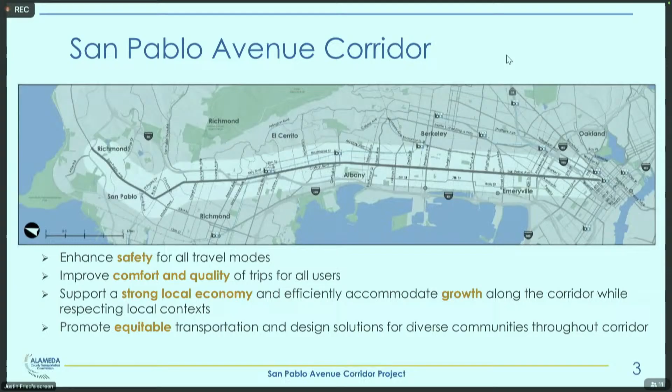In 2022, after several years of planning and visioning and considering different options for the corridor, there were 3 different projects identified to move forward within Alameda County, 2 of which touch the City of Albany. This map shows, in a very stylized way, what those 3 projects are. This was based on years of outreach as well as technical considerations. Within Albany, the two projects are safety enhancements, shown in green here. These are improvements to make it safer and easier for pedestrians and cyclists to cross San Pablo Avenue, as well as some transit stop improvements to make buses move more efficiently along San Pablo Avenue.

And then the other project is parallel bike route improvements, which provides accommodation for cyclists traveling north-south through the broader corridor on low-stress bike boulevard type streets parallel to San Pablo Avenue. The third project, which Alameda CTC is working on with the cities of Oakland, Emeryville, and a piece of it touches Berkeley, is a longer-term project that would implement dedicated bus lanes and bike lanes on San Pablo Avenue. But that is not within the City of Albany. Next slide.

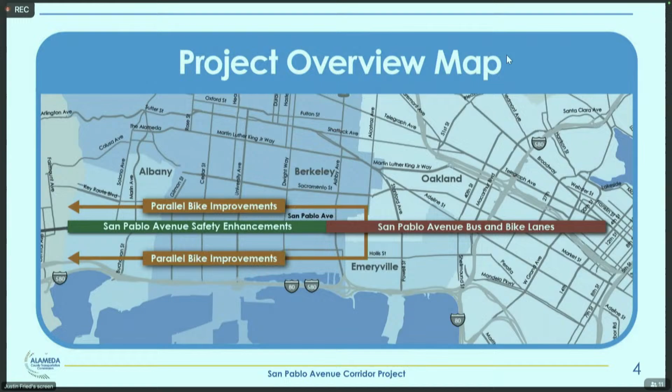This is a bit more of a zoom in on the northern two projects. So the yellow bar is intended to reflect the safety enhancements project, which extends from essentially the county line, the El Cerrito Albany city limit, down to Heinz Avenue, which is kind of north of Ashby Avenue in South Berkeley.

Within Albany, this project sort of fills in some of the locations. The city had a recent pedestrian safety improvement project along San Pablo Avenue that installed things like median refuges, flashing beacons, curb ramp upgrades at a number of the intersections. And then this project will kind of address some of the intersections not addressed by that project, such as Solano, Washington, Clay, Brighton, Marin Avenue.

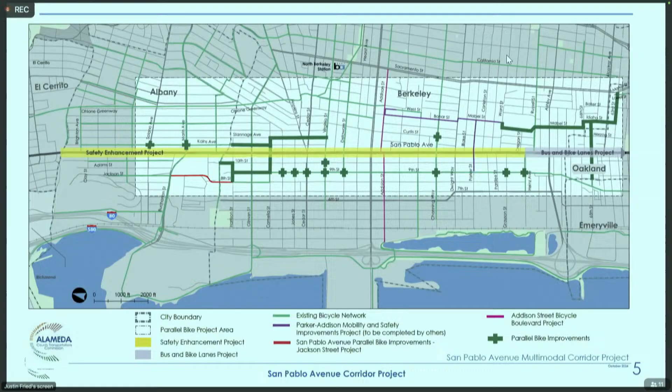And then the parallel route improvement project is represented by the bold green lines. And within Albany, there are two locations that the parallel route improvement project covers, which are the intersections of Kains Marin and Kains Solano, and the project is focused on crossing improvements for the bike boulevard crossings of those major streets. Next slide, please.

So this is just a little more detail on the types of elements and the status of the two projects. And I should mention that the Transportation Commission and actually City Council both got a presentation and took actions in support of the concept design of both of these two projects back in 2023. And since that time, we have secured full funding for the projects, made significant progress with the design of the projects,

completed all of the state environmental clearance, and we're close to completing the NEPA clearance for the Parallel Bike Route Improvement Project, which does have federal funding. And we're projecting to be ready to advertise this project for construction by spring of next year.

I talked about some of the elements that are within Albany, which are the major street crossing improvements at Kains Solano and Kains Marin. Elsewhere, this project within Berkeley and North Oakland includes elements such as diverters, traffic circles, wayfinding, curb ramp work, street paving. But in Albany, because of the work that the city's already done on the Kains and Adams bike boulevards, the project's really focused on those two crossing locations.

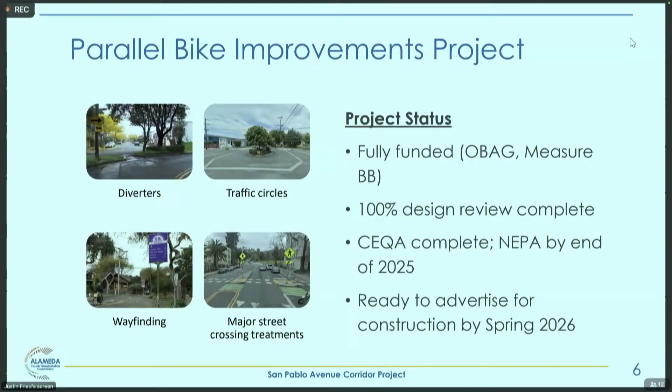Next slide, please. The safety enhancements project includes elements such as bus bulbs, which are large bulb outs allowing a bus to stop in lane, expanding the space for passenger waiting and meaning that the bus doesn't have to pull out of traffic and pull back in. These are proposed at the limited AC Transit stops, which within Albany is Solano Avenue and San Pablo Avenue.

And then there are also various locations with pedestrian hybrid beacons, flashing beacons, median refuges, curb ramp upgrades. There's also two locations where there are offset intersecting bike boulevards where the street doesn't connect directly through, and the project would be installing a short one block section of protected bikeway along San Pablo to assist cyclists in making that connection across San Pablo. One of those locations is within Albany at Clay and Brighton.

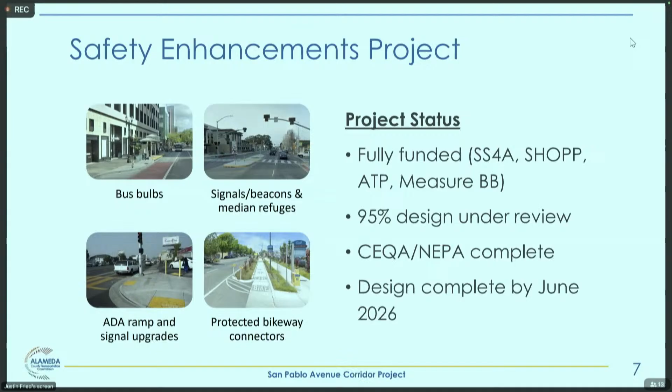This project is also fully funded, and we're at 95% design. We've completed all the environmental clearance, and we're also projecting to have design complete and be ready for construction by summer of next year. Next slide, please.

Just wanted to touch on some of the refinements that we've been making on these projects as we've been coordinating with city staff on the development of the plans, specifications, and estimates, and since the last presentation on the concept design to the Transportation Commission. So with the parallel bike project, and some of these are not within Albany, one of the topics has been bike detection at major streets.

In the Berkeley sections of the project, based on city experience with different detection technologies, and at their request, we've changed from video detection to push buttons. It's actually still a topic of discussion for the Albany crossings at Kains Solano and Kains Marin with city staff, just given some of the unique geometric considerations at those intersections that might make video a little more favorable in terms of bikes waiting where you would want them to.

The next 3 bullets here are really all outside of Albany. There's been a lot of work refining curb ramp designs and actually bringing some of the Albany-developed curb ramp design guidance to other jurisdictions and having that cross-pollinate across the plans.

The traffic circle locations within Berkeley, we have some of them we've moved to a mountable traffic circle design that works better with some of the light industrial land use there and large truck activity at the intersections where they're proposed, as well as just refining the sizes of the circles to accommodate necessary design vehicles.

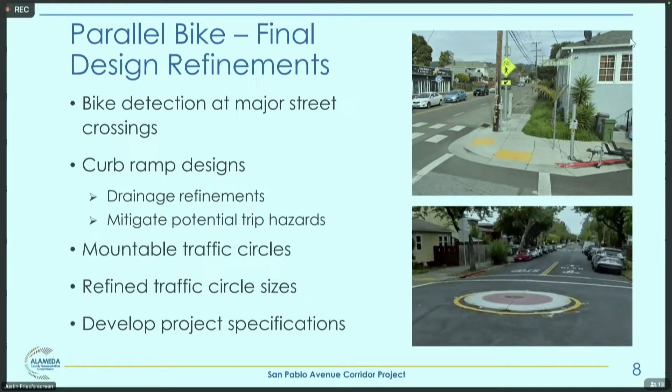On the safety enhancements project, some of the topics that have been major focal points is the final design has been refined. Again, the curb ramp designs. There's some challenging locations along San Pablo Avenue where you have business doors or other constraints right up against the back of the sidewalk that makes it challenging to achieve ADA compliant ramps while also getting directional ramps in there and all of the other things that we'd like to see in best practice curb ramp designs.

The bike detection technology on this project, we've also moved away from video towards inductive loops, towards push buttons. Within Albany, this partly relates to the fact that these are at Caltrans operated traffic signals, the traffic signals are maintained by Caltrans, and they have a lot of say in the detection technology as a result.

The bus bulbs, we've been working to figure out the drainage and the grading of those so that the curb height is 6 inches, but the slopes are ADA compliant 2%, which in some cases has meant moving to a design where it drains the water back towards the sidewalk and into a vegetated area, just because of existing roadway slopes and need for sidewalk cross slopes.

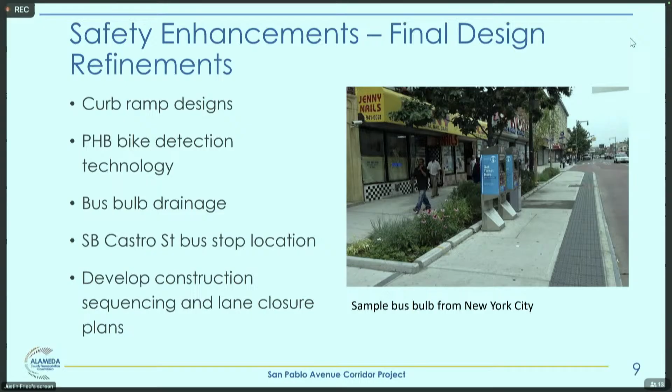This is mostly an informational update, and as mentioned, we do have more details on specific locations that we can turn to. But we do have one requested action, which is we are looking to convene a workshop-style meeting around the parallel bike project to talk about a couple of design topics that are of cross-jurisdictional interest for a cross-jurisdictional project. And we did want to ask if the Transportation Commission could select somebody to be the representative to that meeting and then report back afterwards. So hoping you could work among yourselves to find somebody and take an action to nominate someone.

Just a question about the timing of that. When do you plan to convene that? What's the window? Ideally before the end of the year, and this would be a virtual meeting, but the end of the year is quickly seeming very close, so we'll have to see if that's feasible. Yeah. Any questions from the commission?

Sorry, gathering which one to start with. I noticed in the presentation provided in the agenda, with some more of the specifics at each intersection, there were some where there was a callout for the detection on one side but not the other. I'm wondering if that was just a formatting thing. Let me pull up one as an example. That was just trying to keep the image from being too cluttered with too many callouts.

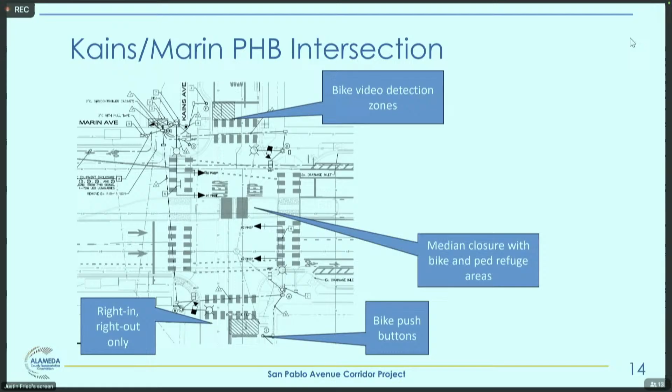Thank you. And then at the San Pablo crossings at Washington and then Brighton and Clay, where you have to do the little jog over, is any wayfinding or signage included in those plans? So the Washington crossing actually got quite a bit of discussion when it was presented to the Transportation Commission a couple of years ago. What's proposed here is signalizing the south leg of the intersection, which right now is unsignalized, and then essentially mainline San Pablo Avenue traffic would be held while cyclists and side street traffic make the two turns, one onto San Pablo and then the other off of San Pablo onto Washington.

So there are sharrows currently proposed in the design because it would be a shared lane operationally for bikes, but they would be doing it without mixing with the main San Pablo traffic. We don't currently have any specific wayfinding signs. It's something we could take a look at with city staff, maybe something on the side street approaches directing people how to get through the intersection.

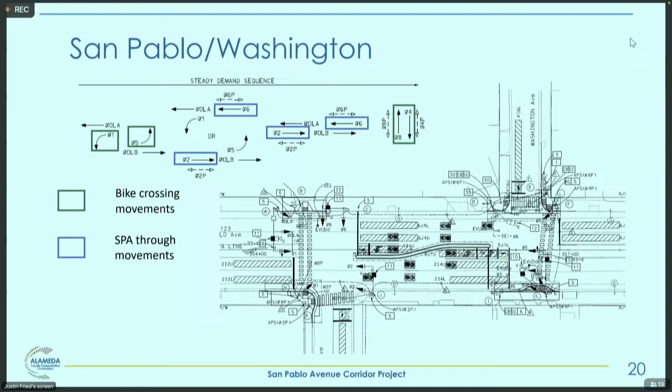And then the Clay and Brighton one is actually proposed to be a Class 4 separated bikeway with a concrete separation island between the outer travel lane and the bike lane. There are supposed to be intersection crossing markings for cyclists, which would convey the path through the intersection. But yeah, again we could look at wayfinding on the side street approaching it. Thank you. I have one more question.

Oh, while we're on this slide, if I may. There seems to be a net parking loss in this section on San Pablo. Could you detail how many parking spaces are lost? The red curbing. Yeah, I don't have that number available right now. We did do outreach to all of the businesses back in 2023, before we brought the concept design to the Transportation Commission and the council.

The two blocks here, one of them on the southbound side is the Albany Bowl redevelopment site, and that's going to have very different uses with different curb management needs. The northbound side is predominantly the Goodwill, which has a large off-street parking lot. But there are two other businesses there, and I personally use those parking spaces, and I'm just concerned about the loss of those. So it'll be useful in future iterations if you can detail that for us.

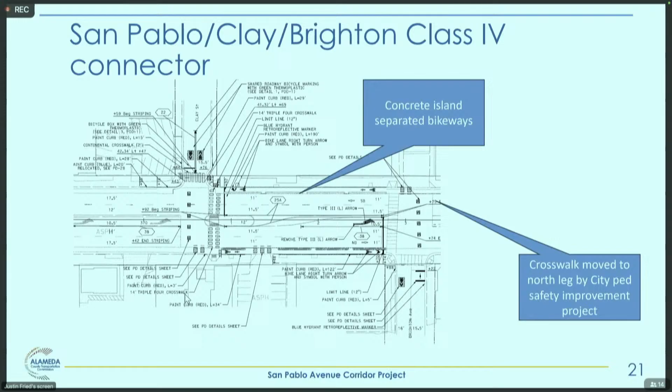Okay. You go ahead, and then I'll ask mine. Actually, if I could follow up on Judy's comment, two other businesses on the northbound side? Yeah, there's a dog grooming and a ceramic studio. Aren't those located to the south of the stoplight? No, I don't think they are. I believe the red line is more or less at the intersection, what the redlining will affect. Okay, thank you.

My last question is about the bike detection cameras. You mentioned there's a question of whether you want to use them or not, and I'll save some thoughts for the comment section. But I've also observed that they're effective in some locations, like I use the Ashby and Hillegass crossing every day, and I think that one's really effective. So is there anything you've found that makes some technologies more effective than others? And is the plan to use those types of effective technologies in this plan?

So as the agency that's constructing this project but won't actually own and operate it, we're largely deferring to the agencies that are going to own and operate it in terms of what technology or which product they want to see. And oftentimes it's what they're currently maintaining, not wanting to maintain too many different technologies or products.

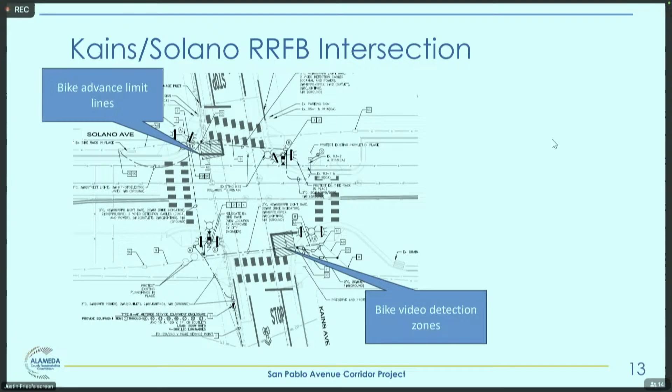Thank you. Any other questions? You had one. Yeah, this is just a really straightforward question. Are these plans coming back to us for review at any future time? We are planning to come back to the Transportation Commission. Okay. Probably early next year.

Okay. So right now, this is not the time to hash out all the details, is that what you're saying? Or do you want as much feedback and hashing out of questions as we can get now? As much as we can get now. Okay, perfect.

And just to follow up on that, what is the anticipated timeline of this project? When would it actually begin to be built out? So for the parallel bike route project, we would have the design complete towards the end of next spring, which means there's some time to hire a contractor. Actual groundbreaking would be towards the end of next year, most likely. For the safety enhancements project, it's about 3 months behind.

And then just as a general comment, throughout this presentation and many presentations that I've been to as a commissioner on the Transportation Commission, we refer to bikes. We're talking about a whole bunch of other modes of transportation, and I would encourage all of us to use broader language when we're talking about the use of these lanes. It's personal transportation devices, it's electric bikes, it's all sorts of things. So bike is a little bit dated in its usage, and I think we should broaden that.

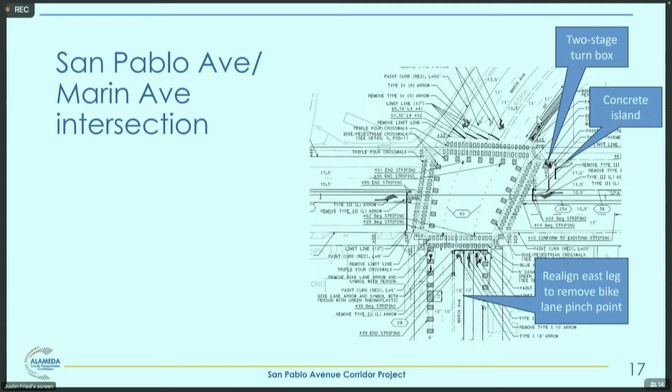Okay. So there's actually kind of a convoluted storm drain hazard there as well. Yeah, that storm drain would be reconstructed as an inlet type where it's contained within the curb and not sticking out into the bike lane. And then right now, cars sort of start the turn as they're going into the intersection and drift into the cycling or mobility device lane, so it would straighten that out approaching the intersection. All right, thank you. Any other questions or comments from the audience? Okay. And back to the commission for discussion or any other questions that may have come up.

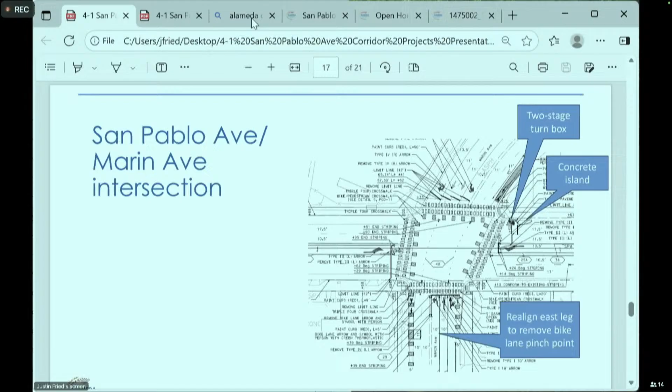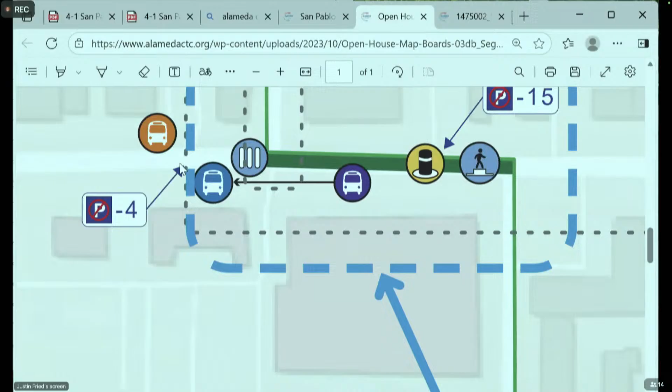Well, let me just add, since there was an earlier question on the parking, I did bring up the earlier outreach materials that identified approximately 15 spaces of parking impact between Brighton and Clay, and then approximately 4 north of Brighton with the relocated bus stop. Correct. Thank you.

Well, first, I just want to thank you guys so much for all the work and for bringing it to the commission. It's really great to get to look at and comment on. And also to all the public comment, really great ideas, and I hear you, and I definitely want to urge everyone to stay engaged with the active transportation plan. I hope that we've heard what people were suggesting about the intersections and the connectivity, and especially the all ages and abilities. And if those things can't get addressed in this already 100% design, I'm looking forward to carrying that energy to the active transportation plan. So maybe we'll have some more updates about timing of that.

But on this plan, acknowledging again that it's at 95 and 100%, but also piggybacking on the suggestions that Ken earlier made and a public comment made, I would like to urge also for those, what is it called?

The little slot, I think someone called it, especially at the Marin crossing and the Solano crossing, to relocate that push button, especially if we're looking at the possibility of eliminating the video detection or having a combination, basically a situation where we're relying on the push button. The way it's currently configured, especially in each of these intersections where cars are going to be turning right, is with the push button also on the right. It just automatically puts the person using the bike lane in a dangerous position for the car turning right.

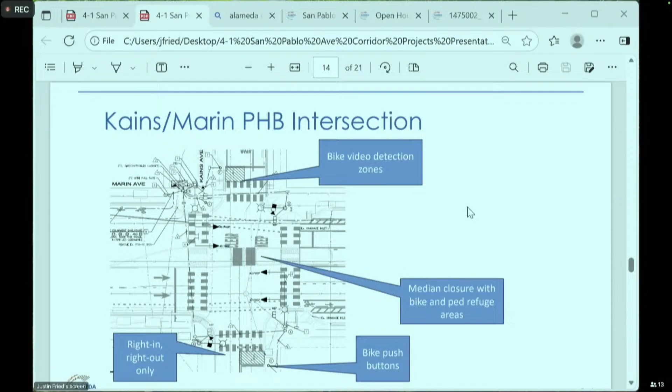For the cross-jurisdictional meeting, I'm happy to be an alternate if Ken can't make whatever time comes up. If there's anyone else who's particularly interested in attending. I was going to nominate Ellen, but I don't know if she wants that nomination. I was going to nominate Sarah. Honestly, I think anyone. You guys would be great. And if someone else would like to be the alternate to Ken or wants to be the primary, I'm totally open. Does not matter to me. I have a pretty flexible daytime schedule, except for the first 2 weeks of January. So an alternate is a good idea.

Okay. Frida, your comments made me feel like I needed to ask a couple more clarifying questions. We mentioned earlier a net loss, or Justin counted up a net loss of 19 parking spaces. I assume that 19 parking spaces is the full extension of San Pablo north and south through Albany, but you counted 19 parking space loss. That's for the Clay to Brighton zone that you asked about. Clay to Brighton is 19 spaces. Okay, so the net loss is not counted yet.

But I just wanted to point out that I really hope that we can make this work for all users. And I know currently that the backup on Marin crossing San Pablo at certain times of the day goes all the way up to Masonic and beyond. And I would hope that none of these changes are going to extend that, because that will increase the frustration of drivers, and frustration of drivers will invariably result in risk to bicyclists and non-motorized vehicle users. Pedestrians, yeah. Pedestrians and others, yes. All of us who are vulnerable to cars.

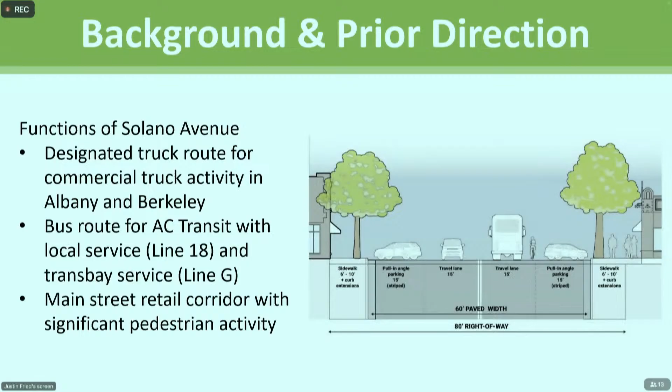It also has various characteristics across its segment, various levels of upgrades that have been done to date, with upgraded curb ramps for Madison to Masonic, upgraded streetscape work really done from San Pablo to Masonic previously, identified short-term accessibility upgrades and sidewalk pavement repairs. That's an upcoming capital improvement project. From Masonic to Tulare, identified additional streetscape improvements needed for that same corridor, and the roadway with similar characteristics continues into Berkeley outside of Albany jurisdiction.

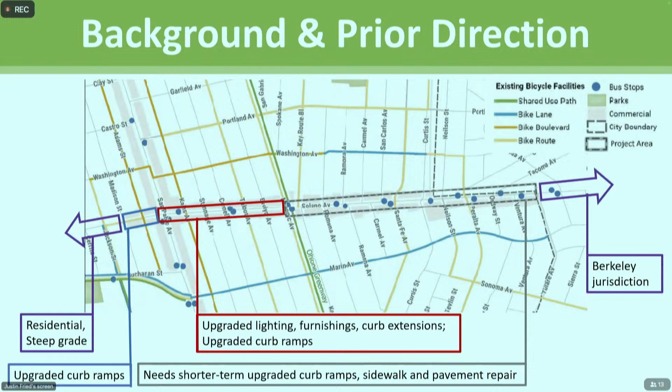And just real quickly, there's sort of two components. We're looking for direction on what to designate or not for bicycle facilities on Solano. A lot of the content will be focused on what we see as the next needed streetscape project, which is Masonic to Tulare, but the more broad network connectivity question would be potentially applicable for a broader segment of the corridor.

So as most of the commissioners are probably aware, the 2012 Active Transportation Plan did not designate Solano Avenue for dedicated bicycle facilities. It relied on Washington to the north and Marin and Dartmouth to the south for parallel facilities. Leading up to 2019 acceptance, there was work done on a complete street study, really looking at the Masonic to Tulare segment for future streetscape improvements. At the conclusion of that study and the acceptance of that study, there was direction to look at the potential for bicycle facilities on Solano as part of the Active Transportation Plan, which is now what we're doing.

We brought some information on the rough concept on a prototypical block to give City Council some idea of the parking implications and other considerations that had been identified as part of this concept. And on May 5th, Council directed us to develop an uphill bikeway concept. So since that time, what we've been doing is collecting feedback, reviewing design guidance, developing the general concept and inventory of the estimated parking implications, and identifying areas that require further study, further evaluation.

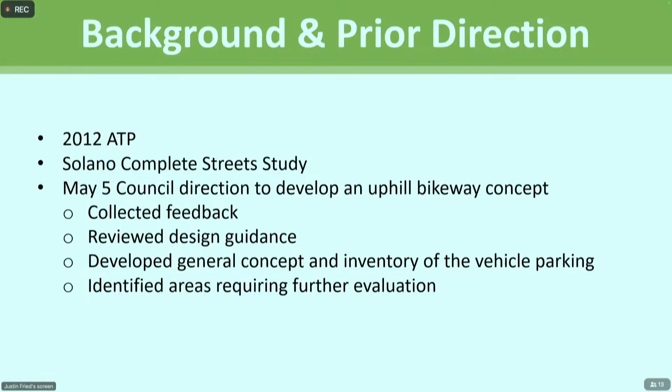So just reporting a little bit that was included in the staff memo from our public engagement. We did engagement on priorities and preferences for Solano Avenue in our Phase 2 network development workshop and online survey. We've also subsequently surveyed the businesses along Solano Avenue, and the online survey that we conducted with that also was distributed beyond businesses, so there's some non-business feedback we got from that as well, so reflecting both of those here.

We looked at extension of Lower Solano, roughly keeping the existing parking and travel lane configuration, and compared that to this parking reconfiguration, turning the north side to parallel and the south side to a sharper angle parking, and with the reduced width of a parallel parking lane and the reduced need for the westbound travel lane, looked at what we could do with that for a one-way uphill cycling facility, as well as what could be done for pedestrian amenities, to get priorities and feedback on that.

And really the feedback we got, while surveys of this kind are not representative, they are a selective group of respondents, they do show a relative preference amongst the businesses that responded for extending the Lower Solano configuration, and relatively even, tied for second preference beyond that between allocating more space for the bike or for pedestrian facilities. And non-business specific public responses showed a preference for the eastbound uphill bikeway, with the second preference being to extend Lower Solano over allocating for wider sidewalks.

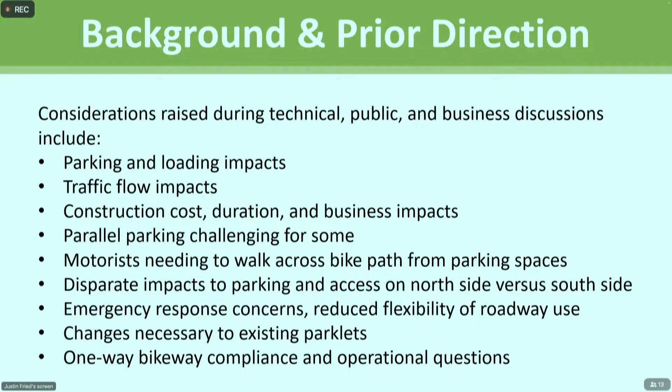Thanks, Justin, and I hope everyone can hear me okay. Good evening to members of the commission. It's good to see you all again. I know you've probably seen me a few times. I'm sorry that I could not be there in person tonight.

But my name is Pete Rossetti. I am a transportation planner. I'm the project manager on the consultant side for the active transportation plan, which is the larger plan that we've brought before this body a few times and are in the final phase of right now. The work that we're doing right here and the concept that we're going over tonight was actually part of a separate task in our contract under the active transportation plan. So as the project manager of the overall project and as a planner, I've been helping out a lot with the screening of concepts, the preparation of the technical memo.

But we also have with us tonight in person in the room, Andrew Lee, who is a civil and traffic engineer and who was the engineering design manager for the concept that we're going to go over tonight. So I'm going to cover some of the high level parts, going over the corridor and the concept. And then when we get into a little more of the nitty gritty, I'll turn it over to Andrew and he can go over some of that.

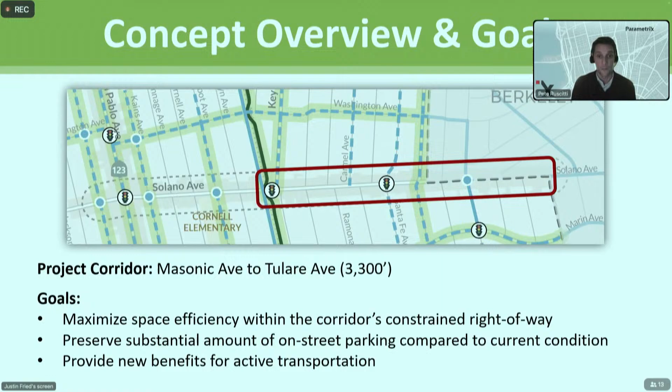This is a bigger photo, or a bigger version of the cross-section that you saw on Justin's slide where it had the 4 across, and this is called the eastbound protected bikeway concept of those 4. And so we're going to zoom in a little bit on that.

And the key there is that it features an asymmetrical bikeway and parking layout. So on the downhill side, on the westbound side, it would maintain as a shared lane. And that tries to take advantage of the higher downhill speeds that bikes are able to achieve. And then over on the eastbound side, we see a normal traffic lane, 60-degree angle parking, and a protected bikeway, which again, Andrew will talk about some of the design features more, but that's kind of a zoomed in version of the concept, and we're gonna dive quite a bit deeper into it as we go through.

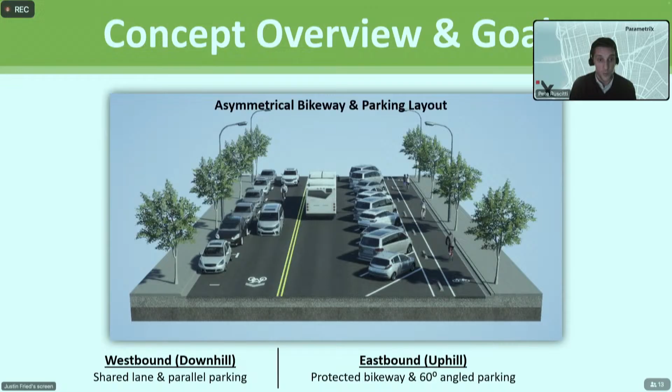Next slide, please. Just a little bit on the higher level planning side about this type of concept. There's a lot of context for this. It's not an ideal type of bikeway. Obviously, you would want to have protected bikeways on both sides, but the idea of splitting the bikeway type in constrained streets and hilly areas where, on the downhill, typical biking and rolling speed comes a little bit closer to that of cars, generally 15 to 25 miles an hour. And the speed limit on Solano is 20, so it falls squarely within that.

But then on the uphill side, many cyclists, especially those who are not using e-bikes, tend to go a little bit slower. The section of Solano that we're looking at has an average slope of 3% and a maximum slope in 1 or 2 parts of around 5 or 6%. That provides the physical separation there. And there's a few examples here. There's a few more examples in the technical memo, and I apologize.

There's a couple yellow highlights there where we weren't able to get what I consider to be perfectly reliable traffic counts for those streets, but based on our knowledge of Polk Street in San Francisco and Fremont Avenue in Seattle and how those are used, those are believed to be well over 8 to 10,000, if not more. And so I just wanted to give a little bit of context for some of the urban or semi-urban village context that this type of asymmetrical bikeway can be used in. And if we can go to the next slide.

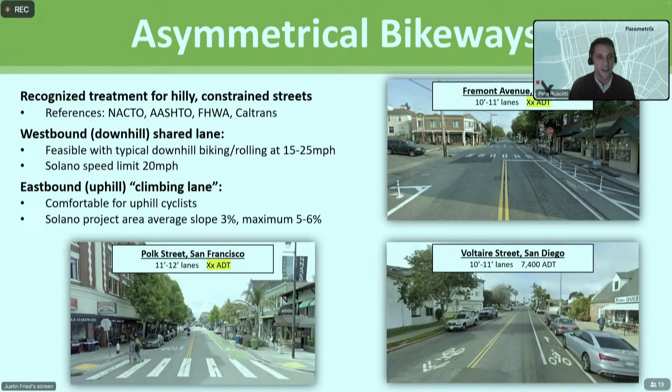I'm going to turn it over to Andrew to go through just a few slides looking at some of the design features. And we're going to walk through the westbound side and the eastbound side, and then talk a little bit about parking, loading, and transit. Andrew, if you're there, please take over. Okay, yeah, I'm here. Good evening, Commissioners. Andrew Lee, Senior Engineer with Parametrix.

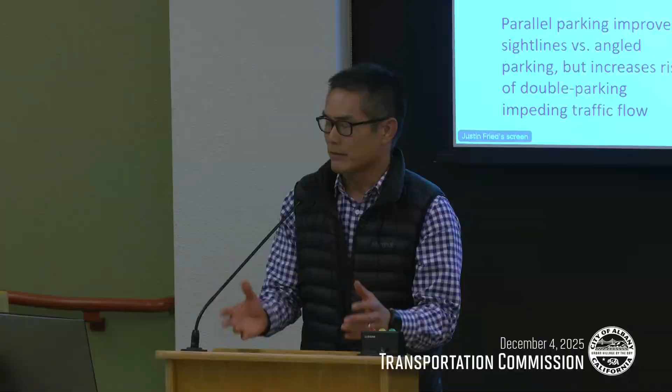I'm going to walk through the details of the design starting from the north side of the street in the westbound direction. And I think what's important to frame this conversation is we're not trying to engineer down to the foot here. We are taking the curb-to-curb existing width, and we are taking industry standards for what is allowed for vehicle lanes, bicycle travel, parking, and we are showing that if we conform to the industry standard, is it possible to fit in a bicycle facility, a rolling facility for that matter, and what are the trade-offs that we're encountering here?

So with that in mind, in the westbound direction, starting from the north side curb, we are looking at a parallel parking arrangement, which is a deviation from the existing configuration, which is angled parking, and we're assuming about 8 feet. And we wanted to go with an 8-foot assumed parking width because that westbound lane is going to be shared between people driving and bicycling. And so for a narrow parking space, an 8-foot width rather than a 7-foot just helps people parking position themselves, and there's still a bit of buffer room for people to open their doors. So we didn't want to go to a minimum width there.

Now, for the 11-foot lane, that is perfectly within the standards for a busy street collector type facility here. But I will acknowledge that for a street with a pretty pronounced downhill slope, it would be more comfortable, honestly, if it was wider.

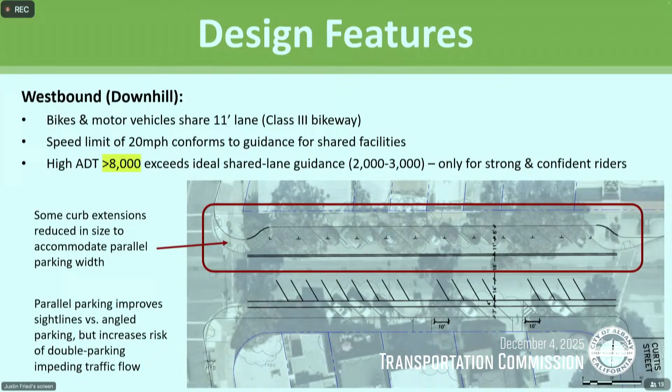Okay, in the uphill direction. So now that we've sort of laid out from the north to the south, we have a remaining amount of width from the 60-foot right-of-way. So we laid it out to be 16 feet for the eastbound travel lane. Then 14 feet for the angled parking, which is now from 45 degrees to 60 degrees. A 4-foot buffer between the parked vehicles and the bikeway, which is 7 feet. And so you may recognize that the buffer is actually wider than the minimum that's listed for separated bikeways. The minimum for a buffer with parking is supposed to be 3 feet. And for the bikeway with a presumed 2-foot gutter, the minimum width per national standards and also state standards is 5 feet, okay?

So we have gotten tons of questions about, could you take 1 foot and send it here, make the sidewalk wider, make the vehicle lane wider? The purpose of the exercise, to frame again, is that we are taking relatively rigid constraints of the 60-foot curb to curb, and we fit in what is an industry standard. And where we landed between the 4-foot buffer and the 7-foot bikeway is we have about 2 feet of flexibility to work with. It's a safety factor. And so rather than get into the details of whether we can make this lane wider or narrower, what we are showing here is that if we proceed into a further design phase, there will inevitably be things that we discover along the way in terms of utility conflicts, or maybe the curb-to-curb width actually is a little bit narrower based on the way it was constructed, or there's just some underground thing we're trying to avoid. And so, again, I just want to frame here that we're not trying to engineer down to the nearest foot, okay?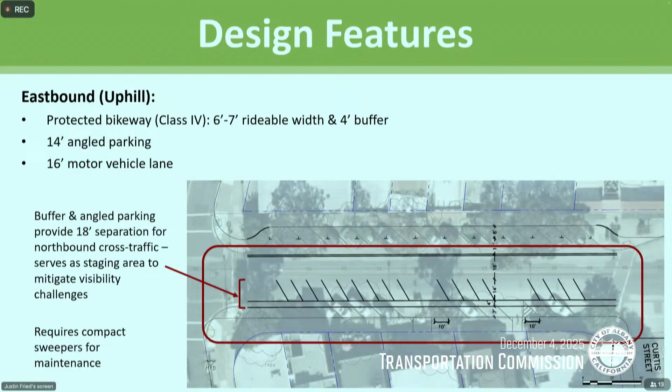Okay, so I did mention this before, the pedestrian realm. On the north side, there are very large bulbs currently on Solano Avenue. They do serve the function of shortening the distance for somebody walking or rolling across Solano Ave, so the exposure to traffic is lessened. In this case, in order to fit in the vehicle lane with parallel parking, those corners, specifically on the north side, the westbound side, would need to be reduced in size. However, they could still remain as bulb outs.

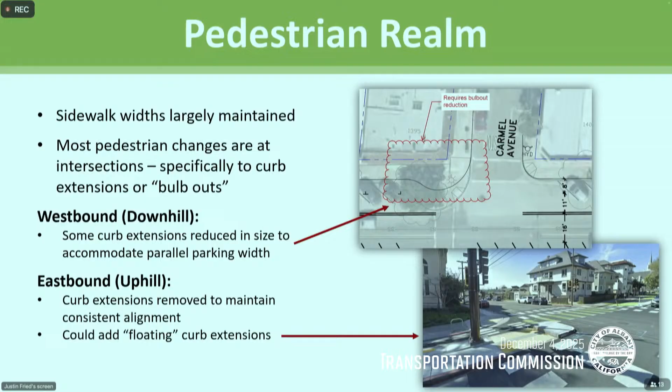Okay, and then getting to the parking matter, because this is what was driving a lot of what we are trying to study in our constraints here. The whole question is, could you fit in a bicycle facility and minimize the change in the on-street parking, because it is a very sensitive use on the street?

Right now, with the layout that we have, we counted 184 parking spaces. We did not differentiate between those being ADA spaces, loading spaces. They are simply counted as curb space that could be allocated any which way the city decides to make policy for. It is just potential space. And then with the design that reconfigures the lanes and the parking, we landed at 173 proposed or potential spaces, which constitutes a 6% loss in the parking supply.

I would not fixate so much on the exact numbers, because I want to emphasize this is a matter of accuracy rather than precision. Meaning, I could see that basically we're within 10% of the existing parking here. If we get deeper into the design and look into the constraints and like, oh, there's a driveway, wow, this is really close, there's a fire hydrant, can't put one here.

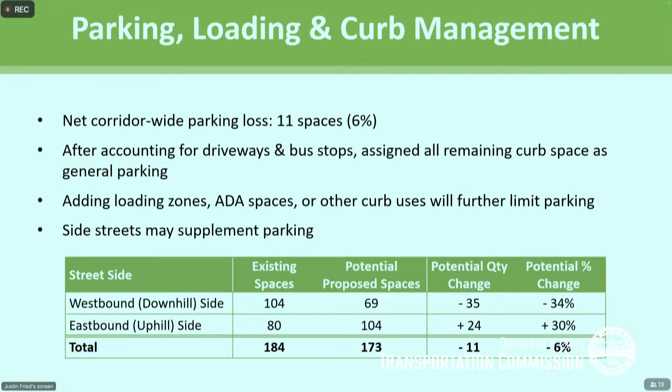With that, though, we did account for driveways, so we did not put parking spaces to block driveways. We also accounted for the bus stops. With regard to loading zones and ADA spaces, they may constitute a loss in the general parking use, but that is really driven by what could be city policy in terms of using the side streets, adding time of day restrictions, paid parking. There's all different ways that we can deal with this. But nonetheless, in terms of just where we landed with the space, we're pretty close to existing, okay? Next slide, please.

Okay, and with the bus stops. The bus stops that we have shown here are consistent with AC Transit's guidance for the length of in-lane stops, meaning that right now this box that we've labeled bus stop is shown to be fairly vague, okay? We are not showing it as a curb extension, a pull-in stop or any sort of island, but in terms of minimizing the amount of space that we need to accommodate a bus stop, having an in-lane stop is going to preserve more parking because you don't have to accommodate the bus pulling in and then back out.

A pull-out kind of arrangement would result in more space that is currently shown as parking being allocated to bus pull-out zones. So in terms of efficiency, the trade-off is that, yes, the bus, as shown here, would be blocking the traffic behind it, including people on bikes in the westbound direction, but the parking count is going to be on the higher side.

There is more work to be done in terms of what these islands look like, the drainage, the civil design, and also I will note that the parking analysis and the conceptual design does account for several bus stops being removed as part of what was identified in the 2019 study. Okay, next slide, please.

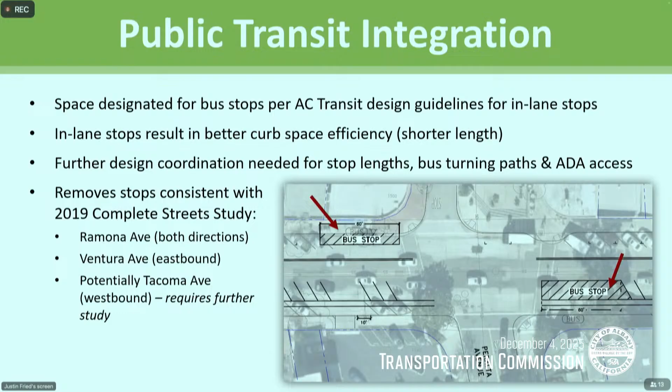Andrew, I think I can take this slide. I mean, if you really want to. Please do, thank you. Thank you, Andrew, for walking through a lot of technical stuff. Wanted to give you a break there.

This is just one final slide where we wanted to conclude the technical takeaways. And then after this, there'll be a second slide. I'll turn it back over to Justin, who will discuss some of the process next steps in terms of where the city may go from here in terms of their actual process. But from a planning and engineering, a technical standpoint, we just wanted to summarize. Overall, the conceptual layout does align with applicable guidance, as Andrew noted, quite a few caveats there, but this is all broadly consistent. It really is a way to balance the multimodal desires with the parking.

Like Andrew noted, we believe the specific parking number may change, but generally between maintaining the same amount of parking and losing maybe up to 10%. That's generally the band that we're going to be in, 0 to negative 10%. So overall, that's quite a bit of preservation of parking for being able to also deliver a benefit of a protected bikeway. Like we mentioned, it does make the biking and rolling conditions better, particularly in the uphill direction. But it's not optimal in the downhill direction, and by bikeway guidelines would only be for the stronger, more confident riders because of the traffic volumes that are in the 8 to 10,000 range for this segment.

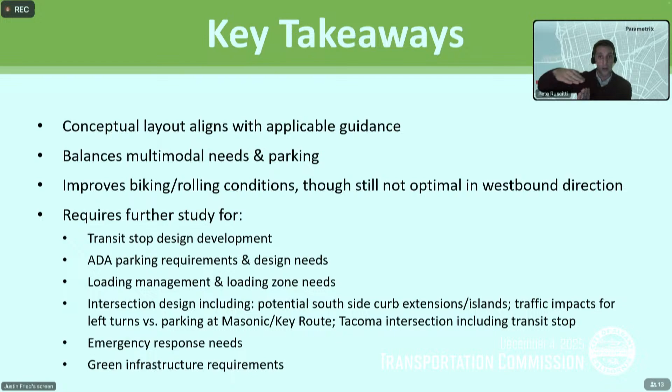And I think, like Andrew had on his slide, the Tacoma intersection, which is at quite an acute angle, also has a bus stop there that we were looking at removing. We noted here that that's going to take a little more civil and traffic design as well to figure that out. And it was beyond the time and the budget that we had for this very conceptual level study.

Finally, I think Andrew or Justin mentioned the needs for fire and first responders and some of the transportation needs that they have. They just gave us some comments about it, so we do want to be able to think through those and discuss those in the next stages of project development.

And then finally, green infrastructure, green streets, and other things like that may be required as part of the engineering and drainage and civil. Okay, that was a whole bunch of stuff from the consultant team. Happy to turn it back to Justin to kind of wrap up next steps process-wise, and then we'll be available for questions. Thanks.

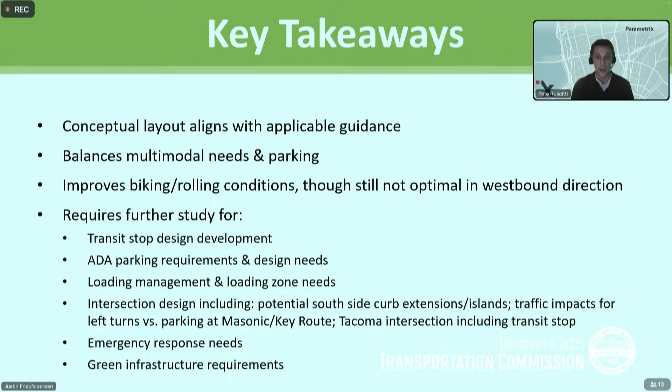Thank you, Andrew and Pete. And so just to wrap us up here, reemphasize what Pete said. We are really at the end of the scope that we have for this under the active transportation plan, and we're recommending that the commission consider a recommendation to council.

And just to try to be clear on how staff sees this, a recommendation to include Solano Avenue in the ATP bicycle network. We would be then looking for bicycle facilities being incorporated in a Solano streetscape improvement project for the Masonic to Tulare stretch in the ATP project list, which is our next phase, along with pedestrian and bicycle crossing improvements, and identifying in that what the next steps are for developing the concept that's been presented.

And I think in my staff recommendation in the memo, I also said if there is feedback on what the commission really sees as a priority for next steps for us to work on for this, happy to hear those tonight as well. And then a recommendation to exclude Solano Avenue from the ATP bicycle network. We've really presented in our engagement with folks 2 scenarios on what to do with that.

One being to basically bring the lower Solano cross-section, angled parking on both sides, existing travel lanes eastward, and really focusing on bicycle and pedestrian crossing improvements with that. And then the other being what we presented, taking this parking configuration that we've been looking at that preserves most of the parking and using the width that's gained from that for pedestrian sidewalk facility expansion, as well as then the intersection crossing improvement.

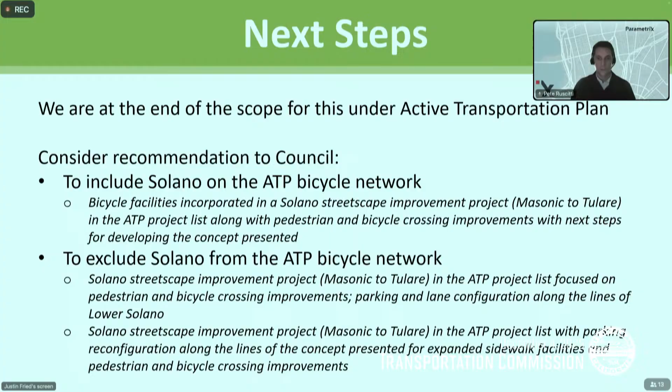Any commission questions? Question. So you outlined a few of the major themes of concerns that people have had with moving forward with this plan. And one of them is this concern about people having to cross the bike lanes to access the car parking on the eastbound, and then also having to cross the bike lane for pedestrians crossing the street, or just people who are kind of moving in and out of the stores. And I wanted to ask, we aren't the first city who is designing a plan like this.

I feel like there's a lot of examples that we can pull from. And so even some locally, I know in Oakland, on Telegraph, there are areas where the bike lane is protected, and you even have to cross the bike lane to access parklets where you can eat at a restaurant that's on that side of the curb.

So I would just like to ask, what has your experience been, or what does the literature show, and local experiences been with these types of projects? Are you seeing that is a valid issue that we should be considering and thinking about? Or is this something that seems like it might be an issue, but in reality, it's not really something that comes up a lot, or have we seen conflicts or collisions of pedestrians and bicyclists at these intersections? If Andrew or Pete has any feedback on that, I'm happy to jump in as well.

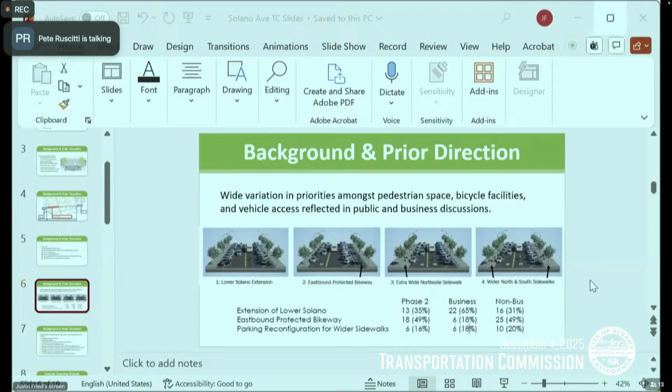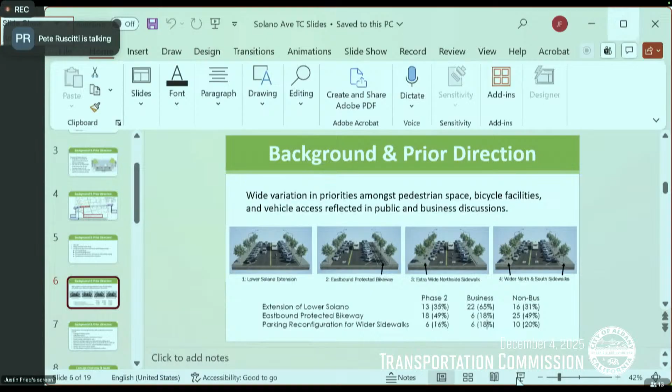And there was also, Justin, I'm sorry to jump in on you there, but please do. There was also a kind of screening matrix below where we gave a plus, plus, minus, minus to different factors like bikes, peds, traffic flow, costs, things like that. That was underneath this. That was the context.

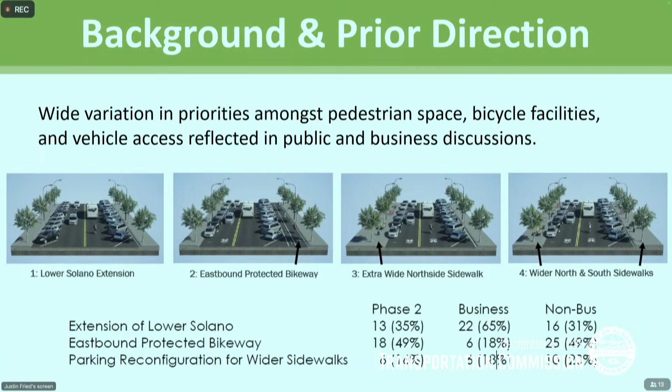Okay, thanks. So some of the ways that you mentioned that parking was considered and prioritized in certain decisions, or could be, was that communicated in the outreach as being an option for the protected bikeway? We communicated the rough 5 to 10% estimate of cost implications that we had from the May initial block work. Thank you.

Michael? Yeah, I have a quick question. There was a few years ago some interest in doing back-in angle parking on Solano Avenue. And the traffic engineers we consulted with at the time said back-in angle parking doesn't work very well if you get above a certain amount of traffic. And what I recall is if you're at 8 to 10,000, what's the acronym? Average daily traffic. ADT. If we're at 8 to 10,000, the problem is it's hard to back up because there's so much traffic behind you.

So looking at all this, that strikes me as being a similar problem for parallel parking, because I've been on crowded city streets in San Francisco, and if you line yourself up to parallel park and somebody's right on your rear bumper, you can't park. So you just drive around Chinatown for an hour looking for a place to park.